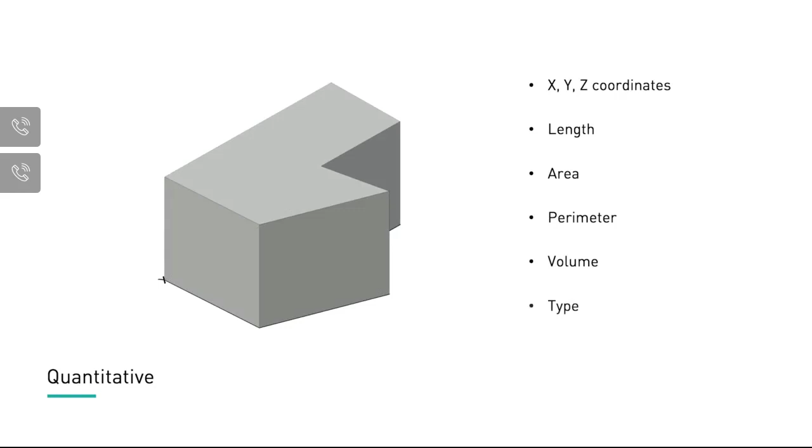XYZ coordinates are a way to locate objects in relationship to a universal system. A vector will give you the length, a polyline will give you a surface and the perimeter. Prisms will give you a volume.

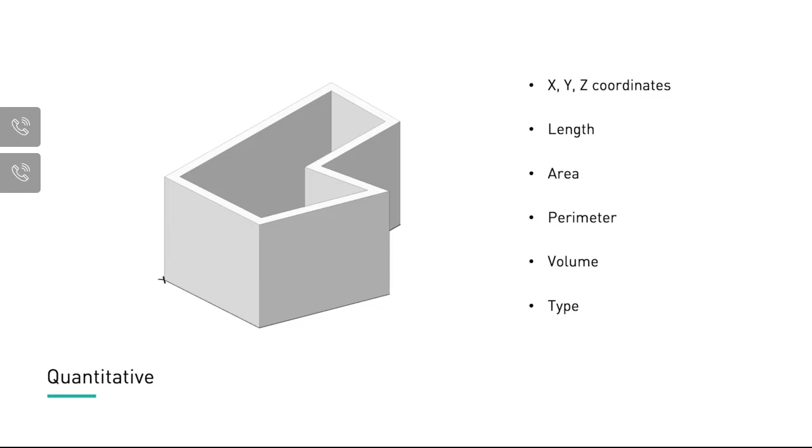And as you progress and assign real building element types, you will start qualifying what the geometry represents. Not only will the walls have a geometric quality, but they can be defined with components. Those components can be qualified with materials.

Examples of qualitative data include the location of building elements in the project. This is how objects are organized in the model, which is really important if you want to collaborate with consultants on BIM projects. I'll come to that later.

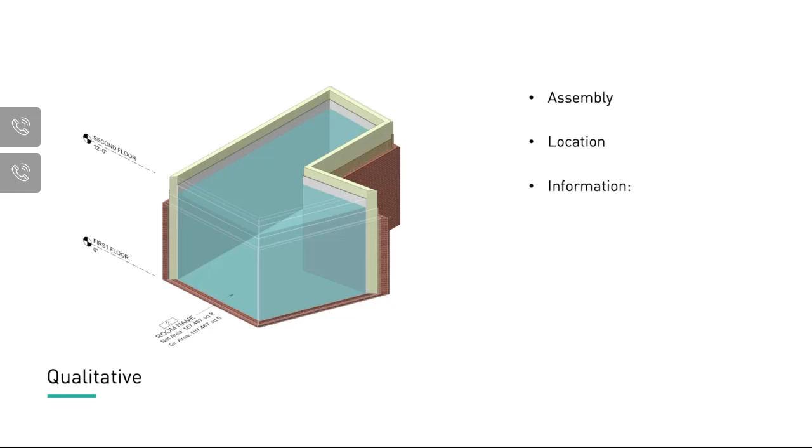So each object will have various sets of qualitative data. A wall, for example, will have materials assigned to each component. The assembly may have a fire rating, an acoustic rating, a function such as shear wall or bearing wall. These are called object parameters.

IFC property set is a type of data used and actually a very important aspect of BIM collaboration. IFC, or Industry Foundation Classes, is mostly known as a file format, but it is actually more than that. IFC property sets allow software to organize the data for building elements, making it possible to communicate between platforms.

Each software has its own internal ways of organizing a BIM model. This format allows those digital models to come together in an organized way. I'll come back to this in more detail later.

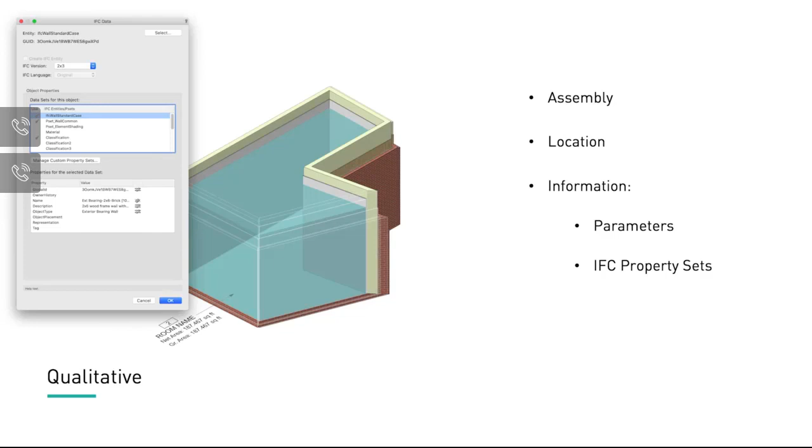As I described on the previous slides, the data can really be anything you want. You can qualify any objects the way you want. We call this a record.

If the data is not included in the object parameters, you can add that data with a custom record. Think of it as a piece of information that you attach to an object, and that information becomes part of it.

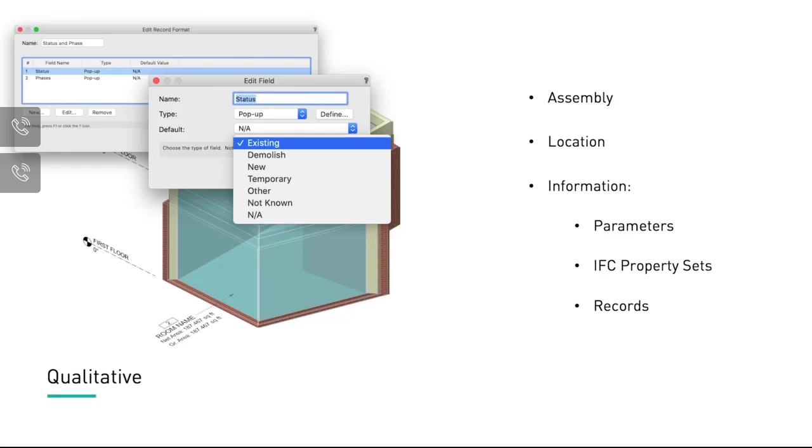As a designer, you can model anything with any types of geometries. For example, you can easily model something and make it look like a building, using solid modeling, push-pull surfaces, NURBS. Those are the types of geometry that will give you just that.

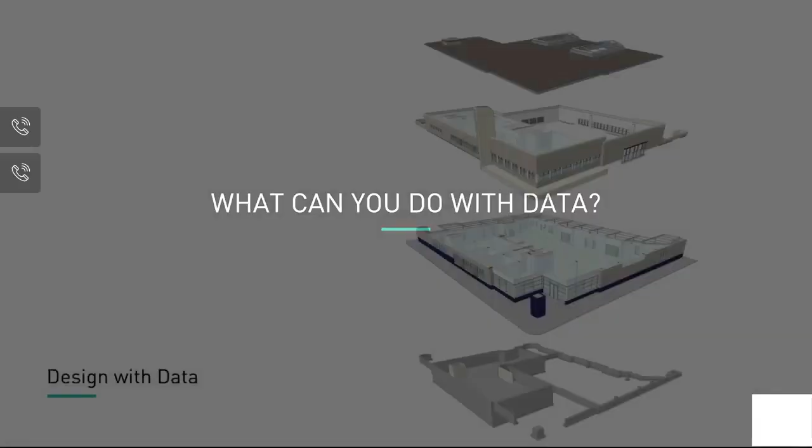Designing with data for an architect means you qualify the geometry. You will use actual building element objects to create the digital model. In this illustration, you see that walls, slabs, doors, windows are used to not only visualize the project in 3 dimensions, but also to automate drawing creation.

Generating elevations, sections, etc. is one benefit you get from modeling with 3D geometry. You say, okay, I can do that with simple 3D geometry, and I do not need to do all of the work and create an actual building model.

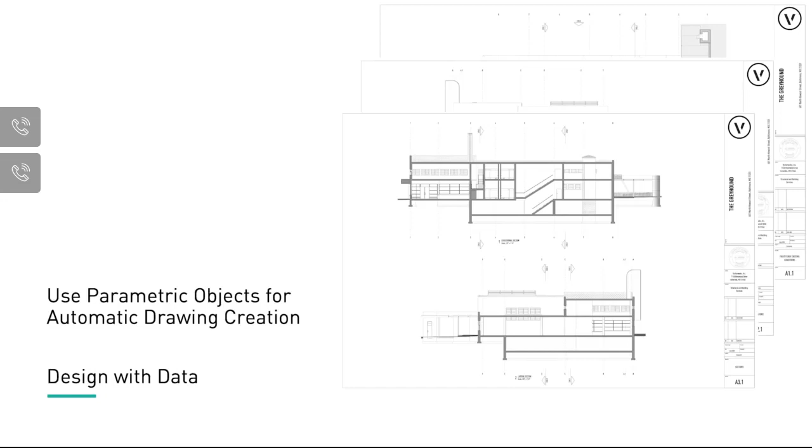Well, here are other benefits of designing with data: automatic creation of schedules and takeoffs. This is where the qualitative data really starts to pay off. When using a door object, the door will have a geometry, but will also contain information such as the frame type, materials, finish, door hardware, fire rating, etc. All of this can be automatically reported on a spreadsheet and will be updated when a change occurs. There is a great gain in efficiency when doing it this way.

Okay, so maybe you already know or are already doing all of this, and you're asking yourself, how can I leverage this data to help my process?

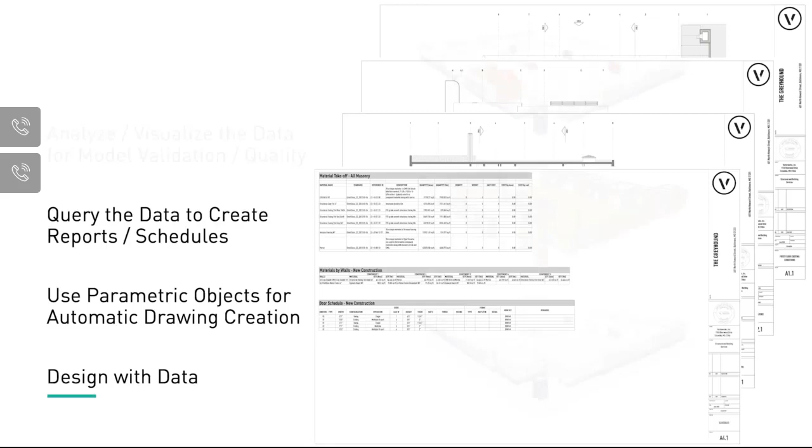There are so many possibilities to really take advantage of the data. You can analyze the model, or use the data for validating or verifying it. This process is great for ensuring that you meet the expectations of the client, or even making sure your models meet a set of standards, and even perhaps create diagrams to better communicate the design intent.

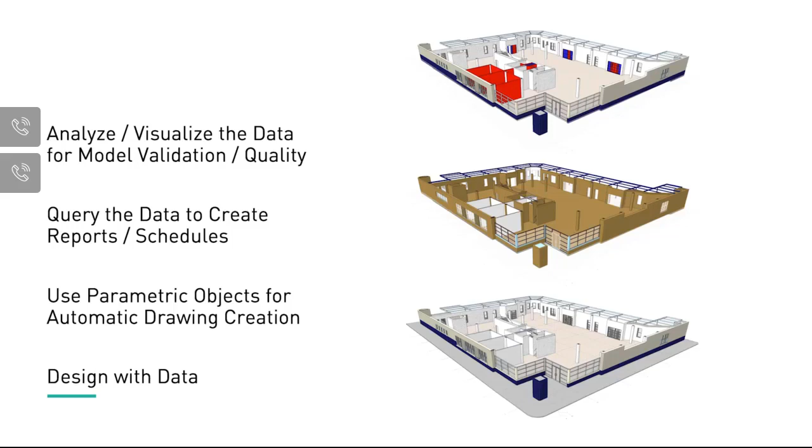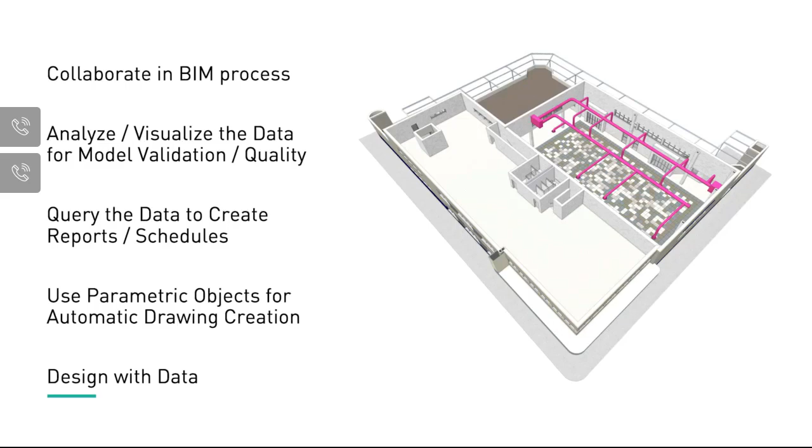We will spend some time with Sarah on how data visualization can support this. And finally, data will give you the opportunity to collaborate with the project team. This presentation focuses on these last two points: how to use the data to analyze and verify your model during the design process, and to ensure the quality of the data before the collaboration process with external stakeholders starts.

So what is data visualization? Data visualization is displaying graphically the underlying inherent information of an object. This information can be displayed as singular values, such as a 1-hour wall rating versus a 2-hour wall rating, or as a range of values, such as glazed area of less than 5 square feet, 5 to 15 square feet, or greater than 15 square feet per room.

I want to show a very simplified example of data visualization, because I think it's a fundamental aspect of BIM, even in a very simplified form. In this document, I have rectangles. These rectangles can be anything, represent anything in the drawing.

If we were drafting, we would have to use some sort of manual label or legend to describe what these rectangles represent. One of the biggest differences between drafting and BIM is that with drafting, we apply this information manually in our drawings. But with BIM, we apply the information to the object and extract that inherent information in our drawings.

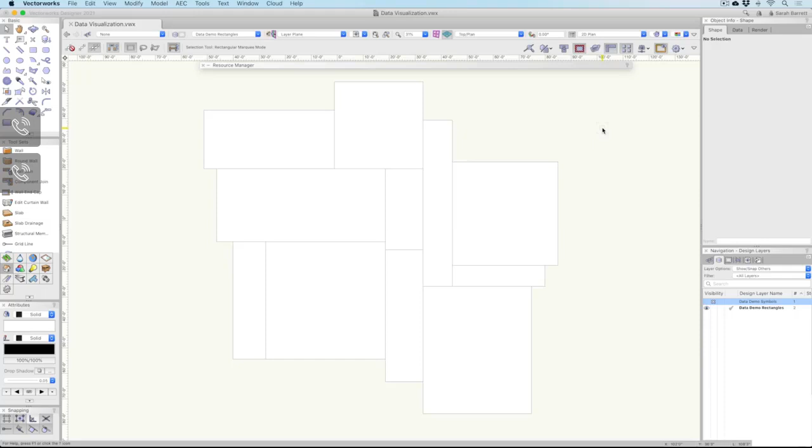This makes the process of creating drawings and representing our designs much less manual. I can convert these rectangles to BIM objects simply by attaching data to them. With data attached to them, they are no longer ambiguous rectangles, but specific objects.

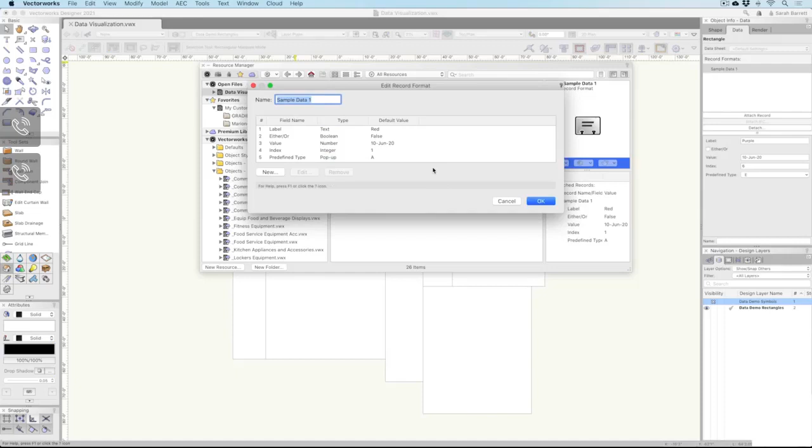I have attached a custom record to these rectangles. A custom record, as Luke mentioned, is a simple table of information that I've created and attached to the object. You can see that this record has several different types of data formats: text, checkboxes, dates, numbers, and dropdowns. All of these can be used in a custom record to better represent the data that you want to convey.

With this record attached, I can query that data in a schedule. I can tag that object to display its data in a label, and I can use data visualization to show that data graphically in the drawing.

With the object selected and viewing the Data tab, you can see the record values of this object. You can also see how the different data types are formatted in the record.

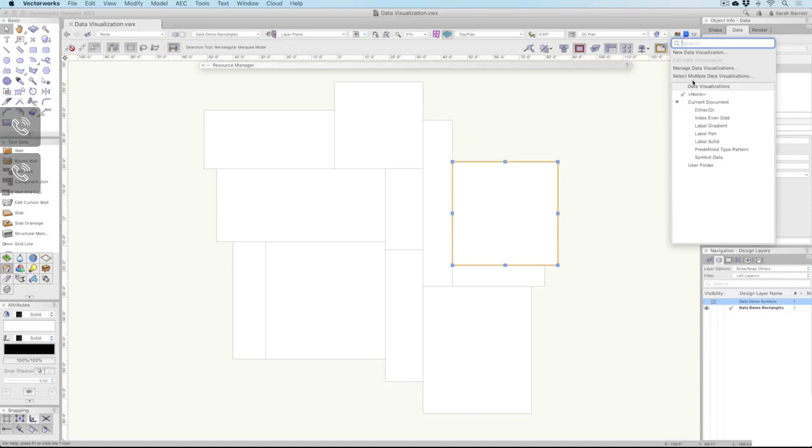So now that we know these objects have data, let's look at how we can visualize that data. This menu up here allows us to manage data visualization. I can turn on an existing data visualization by selecting one.

When I select one, you can see that all the objects in the drawing area change. Some are red, some are green, and others have been grayed. So let's look at what this is showing.

If I go to edit this, you'll see the criteria is all objects. An important thing to note is that data visualization can be applied to objects within groups, symbols, and plugin objects. I'll show examples of this a little later.

The display criteria that is selected is the either/or field of the custom record attached to our rectangles. When you're creating a data visualization like this, when you go to select the parameter that you want, the different values of the parameter that already exist in the document will show in the window below. Once you have those values, you can apply fills, line weights, and textures to each value.

At the bottom of the window, you see a checkbox that says Draw All Other Objects Gray. This means that any object visible in the document that does not match any of the applied criteria will show up as grayed. You can see that these three rectangles are gray, and this tells us that they do not have our custom record attached to them.

Now, if I select one of these grayed rectangles, remember it's selectable even though it's grayed because it's still a selectable layer and class; it's only grayed because of the visualization. I can attach our custom record to the object and it will get the fill color that is associated with the default value. Now, if I change that value in the record, the object will change color again.

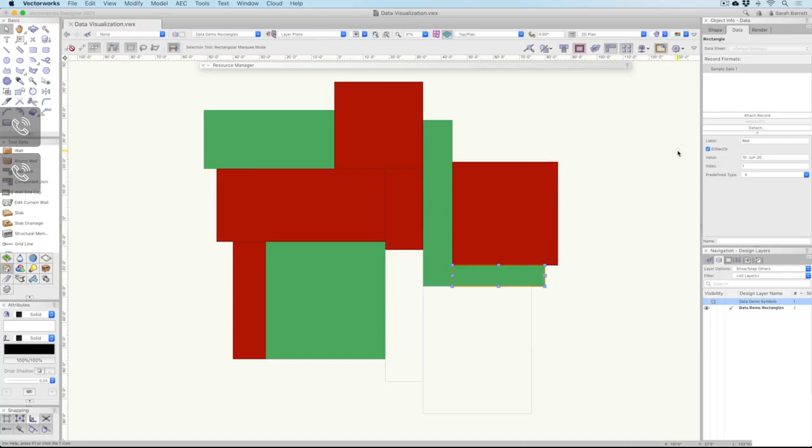The reason for this is that when you model an object, the quantitative data is already inherent in the object. It's automatic. So you can visualize this quantitative data using data visualization as well. So let's demonstrate this by creating a new data visualization. We'll click on the menu and select New Data Visualization. Next, the Define Criteria button.

Because we're going to look at quantitative data, we're going to more stringently define our criteria. We're going to filter by type and look for rectangles. You can see that these are all the object types currently in the drawing. When we select rectangles, you can see that there are 41 rectangles in the document. If we uncheck symbols, then we only have 11 rectangles.

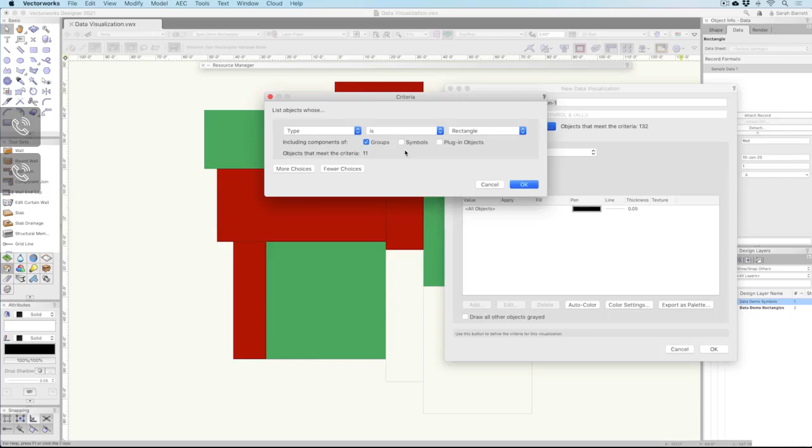We can also add more filters, such as by layer or by class. So let's make sure that we are only looking at rectangles that are on the data demo rectangles layer. We'll click More Choices, select Layer, and then Data Demo Rectangles.

We still only have 11, so filtering by layer may not have been necessary at the moment, but it's important to set up these things with the appropriate criteria from the beginning so that as the file grows and changes, these visualizations remain correct. This is a good practice, not just for creating data visualizations, but whenever you're working with data, be it with creating schedules, tags, etc., the correct criteria is key.

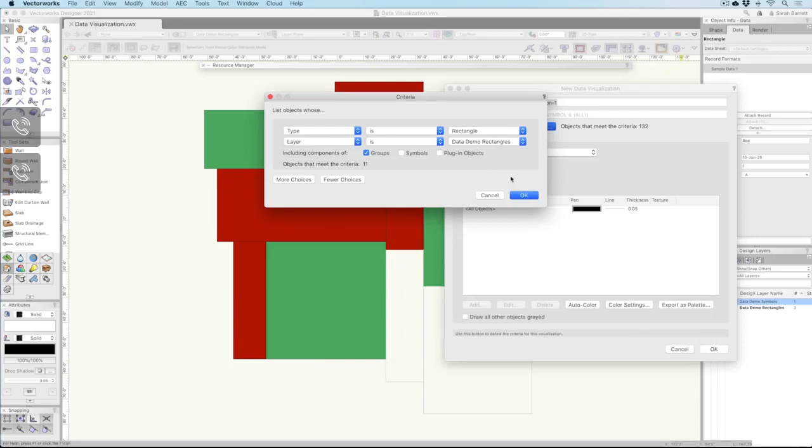So now, if we want to find the quantitative or inherent data of our rectangles, we need to choose Objects Using Function for our display criteria. If you look at the list of possible functions, they mostly refer to an object's size or location, the information that comes from simply creating the object in the file. So we'll stick with area. And you can see all of the areas for the rectangles in the document.

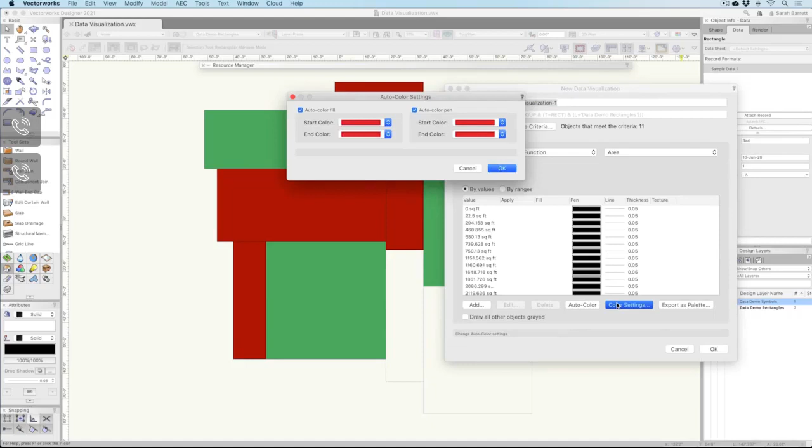If we go to color settings, you can see that we have auto color checked for both pen and fill, with the start color and end color matching. That means that the colors will range in a full rainbow. When we select auto color, you see that rainbow applied automatically. When we click OK, all the rectangles will change color based on their area.

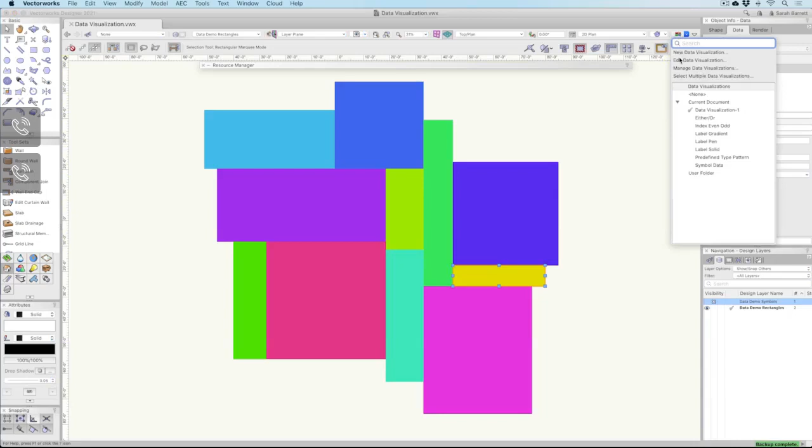There are a lot of colors here, and it's hard to remember what each one means, so it's not a very useful data visualization as is. So we're going to change it to make it a little simpler and a little clearer. We can do this by applying colors to ranges of values. So let's edit this data visualization. And instead of choosing by values, we can select by ranges.

When you choose by ranges, you don't have the existing values to guide you. This is because ranges should encompass future values or standard values that you're already aware of. Our largest value was somewhere about 2,000 square feet, so we'll use that as a guide. When we add a value, we can set the lower and upper bounds for each range. So let's make each range value 500 square feet.

I can apply the attributes and change the colors later, but first I want to set up my ranges. It's important that range values don't overlap. So the gap in the values will depend on the size of the range. So this can be a tedious process, but it's important to know that you can save your data visualizations for use later. You can either save them in your user folder, or you can save them in a template file so that they will always be available from the start of the project.

When doing ranges like this, you already have an idea of the significant range values. So these values are usually based on real standards. And as we're doing now, these values are pretty arbitrary, just to show you an example.

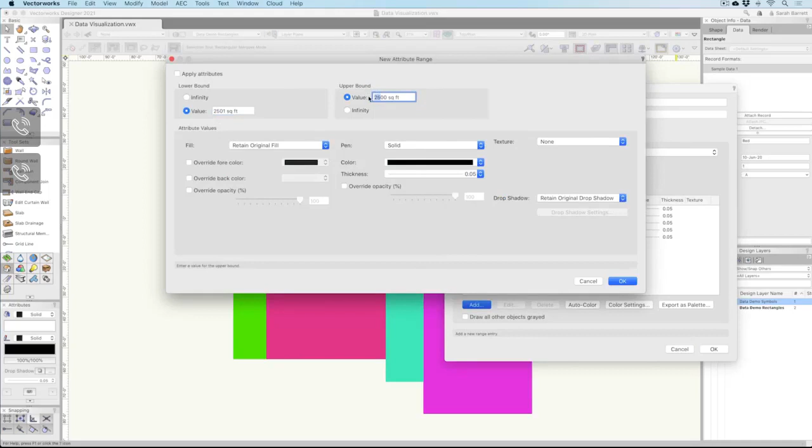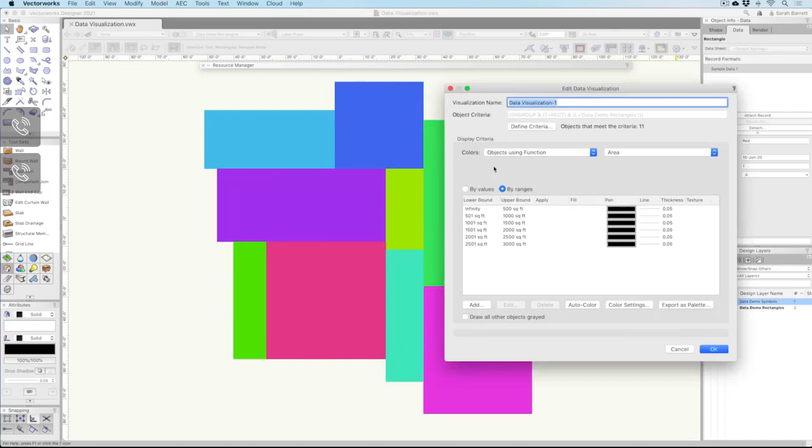Now that we have our values, we can auto color, but let's change the settings first. Let's turn off the pen auto color and then make our range a little closer in color. This way it makes the change in color have a little more meaning, where the more yellow means larger and the more red means smaller.

So now we have our ranges set up. We can see how our rectangles stack up. This type of data visualization can be very helpful while designing. For example, say I'm laying out spaces or dividing an area into smaller areas. With this data visualization active, I can draw rectangles and see immediately how their size compares.

As I change the size, you can see the rectangle change in the color range. This can be really helpful when trying to keep room sizes within certain areas as you're working on a program. It's also important to remember that although these are just rectangles at the moment, they can be converted into more intelligent BIM objects like spaces. Just because your end result will be a BIM model doesn't mean that these quick and easy tools can't be useful and help you further your design.

So now let's look at some more examples of data visualization and how you can use it with BIM objects. So this file that I'm opening up now is a renovation project. So there are existing, new, and to be demoed objects all coexisting in this file. It's important to keep them organized. So they are classed by their status, as well as having custom records attached to them in order to keep their information in line.

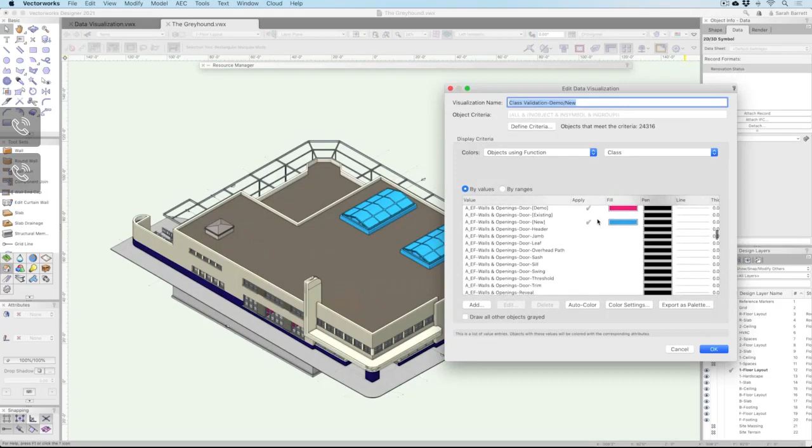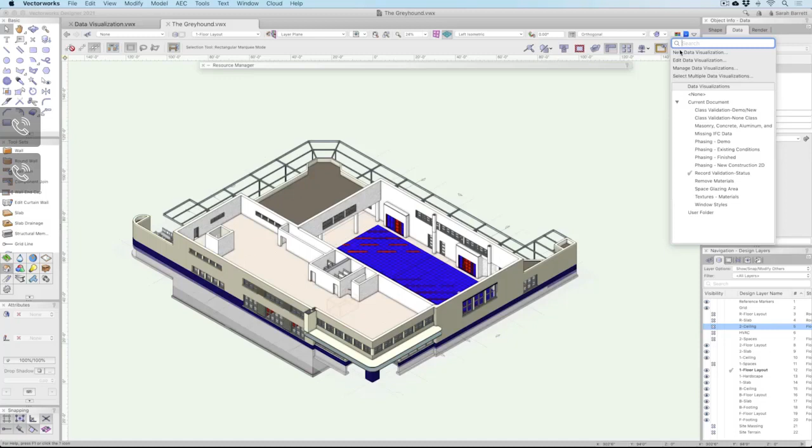There's a class validation data visualization here that isn't particular to a renovation workflow, but is really helpful in any workflow. It is a check as to whether objects are in the none class. If the none class is your active class while you design, you might end up with objects in that class, but you should have either separated them as you were going, or you're going to need to separate them at some point. So when this is turned on, it shows only the objects that are in the none class, so you can change them accordingly. Here you can see objects that are grouped, and those groups are in the none class.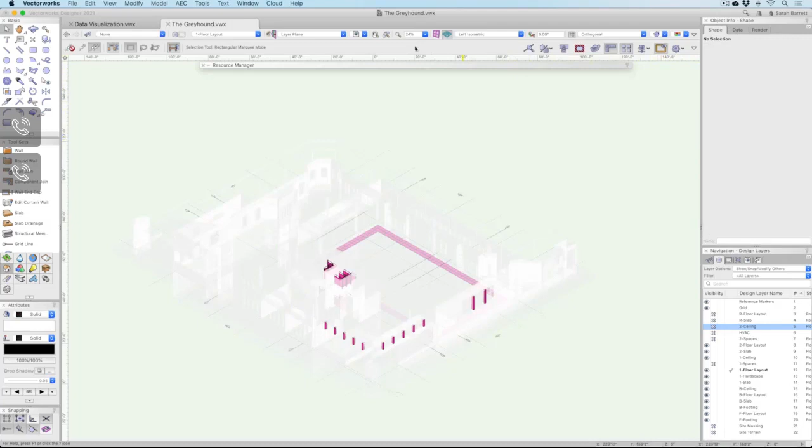Another great object to use for data visualization is the space. The space is an object that delineates a room and acts as a repository for information. Spaces are great for containing data, working with program, and producing diagrams. Here are the spaces for this file. The building is pretty open, so there aren't that many, but they are useful for calculating area.

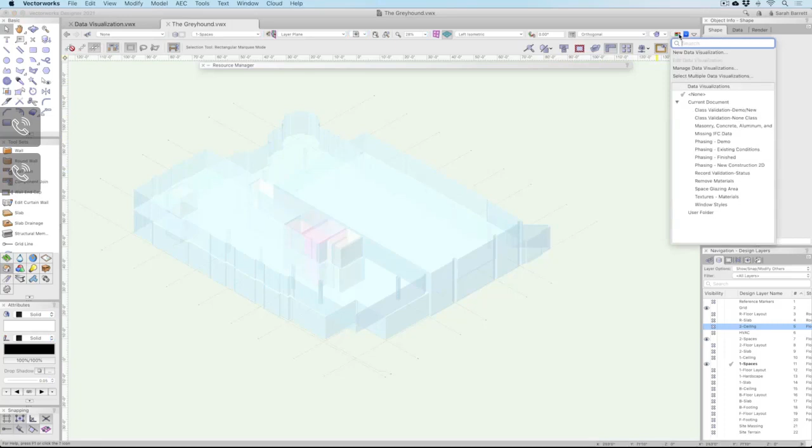Here's a data visualization that shows the glazing area ratio of each space. You can see that this information is pulled directly from the space object, and it's shown in a range. The values in the range are percentages. So the bathrooms, for example, have 0% glazed area. The second story offices have between 3 and 6%, and that large first floor open area has between 9 and 12% of a glazed area ratio.

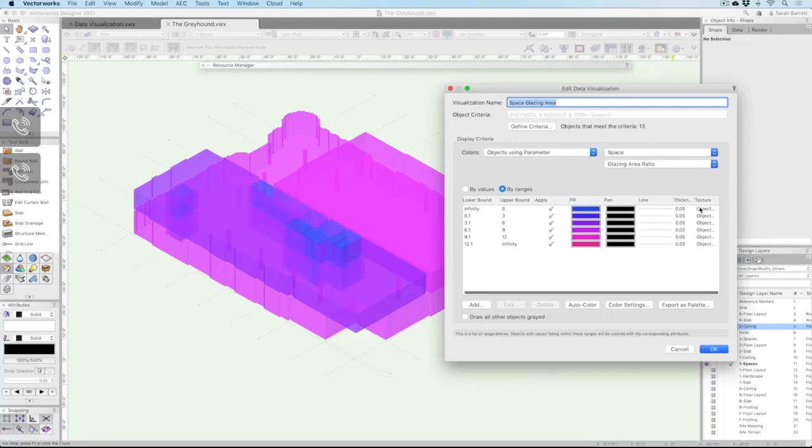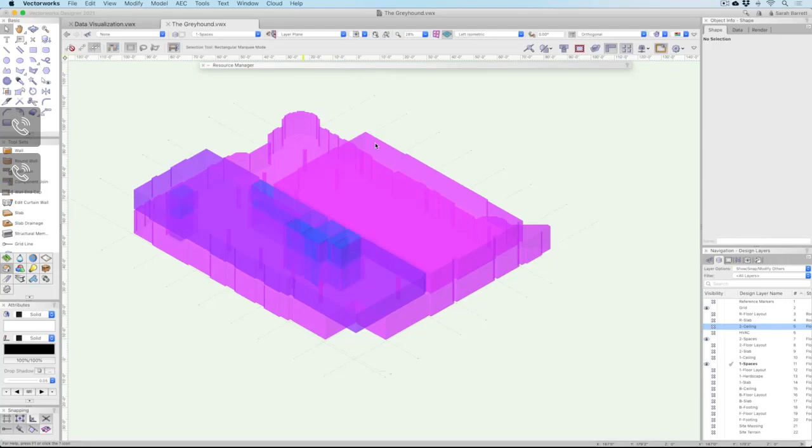There's also a semi-transparent texture that is applied to these colors, so you can see some definition below them. So you have lots of options on what data to show and how your objects can look, not only when you're designing, but also in your drawings. Here you can see a floor plan that shows the demoed and new construction using different line types and line weights.

There's a data visualization applied to the viewport, one made specifically for plan views, and it can be applied to any viewport, so you don't have to worry about coordinating your drawings manually. You let the data do the work for you. When data visualizations are used in a viewport, they can also produce a legend that can be formatted.

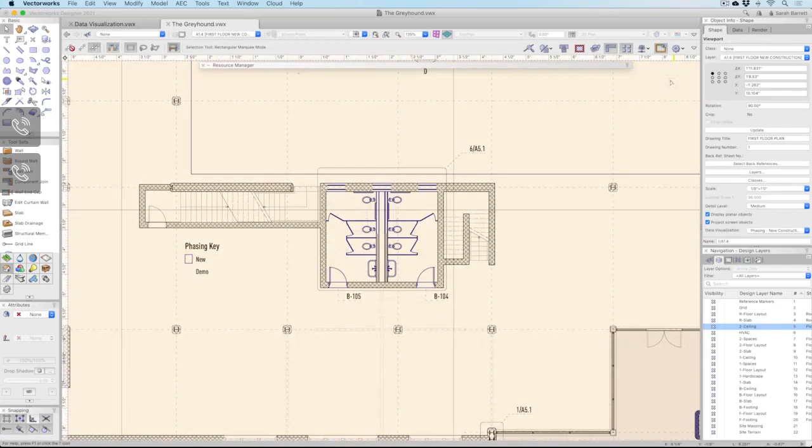Here on this sheet, you can see the same data visualization in a detail plan and another in a detailed demo plan. Because you can control the graphics, you can get the look you want and still have data-driven drawings as opposed to manually drafted drawings.

Data visualization allows you to see the data in your model, not only when you're designing, but also when you're producing your drawings. So it can be used both as a design tool and a presentation aid. When it comes to BIM though, there's even more that can be done with data.

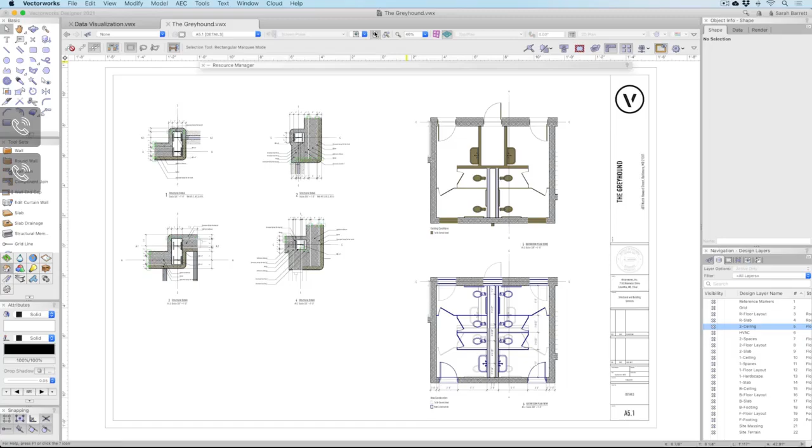You heard this many times. The I in BIM is the most important aspect when speaking of building information modeling. As we discussed earlier, information or data is both quantitative and qualitative. This means geometry and information is necessary to support all processes involved in the life cycle of a building.

Some processes may require different sets of data. We are most familiar with the efficiencies you gain internally during the design process, but many processes need to be supported during construction and for facility management. Each process requires a specific set of information.

For example, during the design process, we are most familiar with the coordination aspect, which is called clash detection process. This process requires the geometry, and it must include the most basic organizational data, which is used to locate each object within the project. This includes space objects, stories, and many more.

During the construction, the contractor may want to create a schedule or maintain a cost estimate. These are the 4D and the 5D processes. After the construction, the owner may want to manage the building operations or assets. For example, asset management requires a specific set of data called COBie, Construction Operations Building Information Exchange.

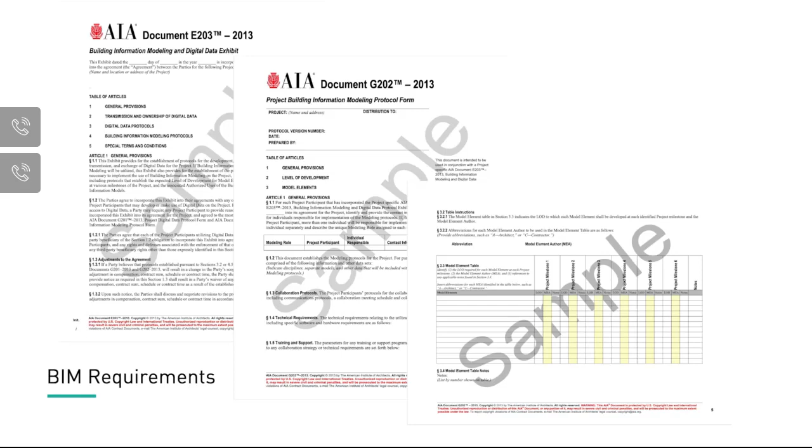We recommend that a BIM execution plan be created to set the specific goals and to establish the requirements. This is often omitted and can be a cause of dispute or litigation. Knowing the type of information needed and what process it needs to support is critical in the success of the project. One of the requirements you will establish with a contract and/or a BIM execution plan is the level of development. Let me give you a quick overview of those.

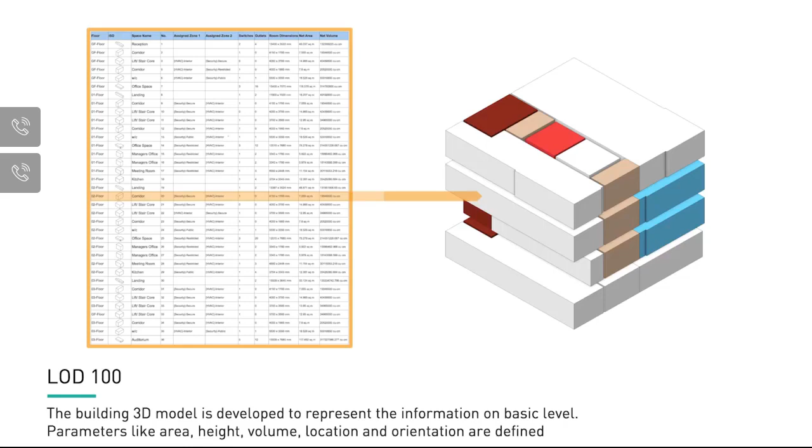A building information model level 1 or LOD 100 represents the information at a basic level. Parameters like area, height, volume, location, and orientation are defined. Note the importance of location. As I mentioned earlier, this information is critical in the organization of a BIM model. This information is typically given by a space object and the stories in the file.

Level 2 or LOD 200 adds building elements such as walls, slabs, doors, windows, but only requires generic information. So wall components, for example, are not required. Note that location and orientation are. This means that these LODs are incremental.

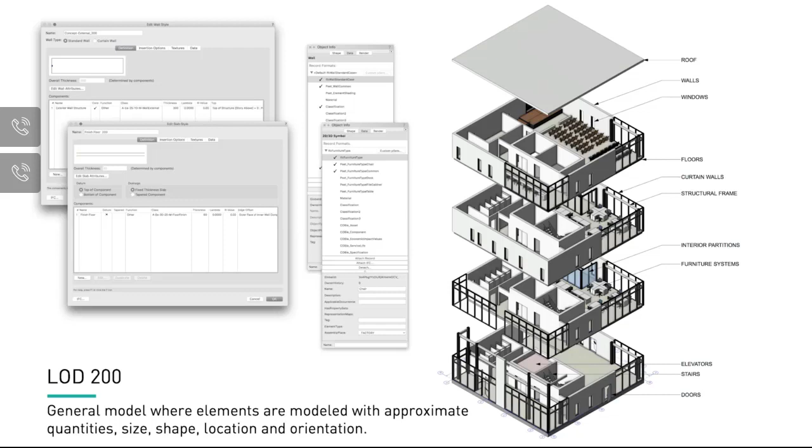And a space object will provide a relationship between the various building objects. So for example, a door will know that it is inserted in a wall and is adjacent to a specific space, and that the wall is located on the 3rd floor, etc. Again, really putting the emphasis on the organizational aspect of BIM.

When a level 3 or LOD 300 is required, the model will typically include additional information qualifying each and every building element with exact precision and will include assemblies and various types of data needed to support the project requirements. I did not include all LODs for this presentation, but LOD 400 is to support the construction processes, and LOD 500 is to support the facility management processes.

So in the case that the project owner wants to use the building information model for facility management processes, the LOD requirement will be 500. And an example of data that will be required for that level is the COBie data set that I mentioned in the previous slide.

So why am I telling you all of this? Well, in the almost infinite amount of information you can attach to any 3D object, one important thing must happen in the software in order for the collaboration process to go smoothly. I talked earlier about IFC. This is how the magic happens.

The IFC workflow organizes that data so that you can send the information required by the project. The graphic may be a bit small here on this slide, but you can see that standard objects have an IFC designation. These are called IFC property sets. They are essential for the BIM collaboration process to happen.

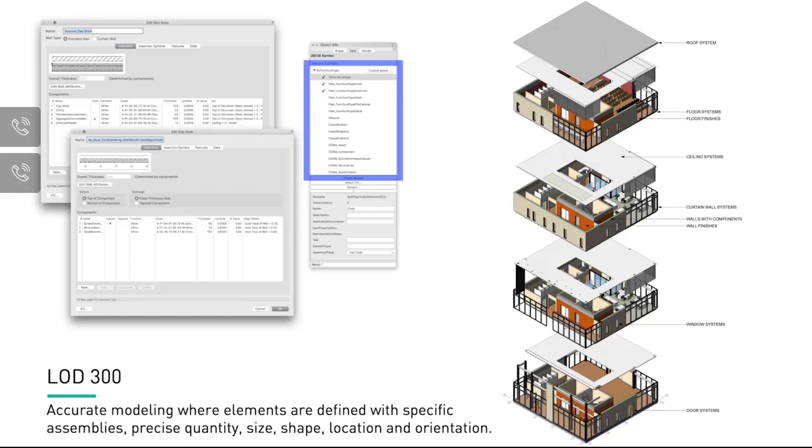The data mapping is what makes this process work. And this happens for the most part in the background, allowing you to freely design without thinking too much about it. But in some specific cases, you may want to customize a set of data or information that is required by the project requirements and isn't included in the standard. There is an inherent complexity to all of this, but I will try to break it down for you.

We learned a lot about the various types of data and how you can view it with colors as you are designing, so with the data visualization. Now let's look at how you can organize, automate, and connect various types of data. Combined with data visualization workflow, this will really make your day.

If you remember earlier, I showed you 3 types of information that are qualitative. The object parameters are integral to each object type. You can access them by editing the object itself or through its style. Any custom records can be added manually or automatically mapped to any object type.

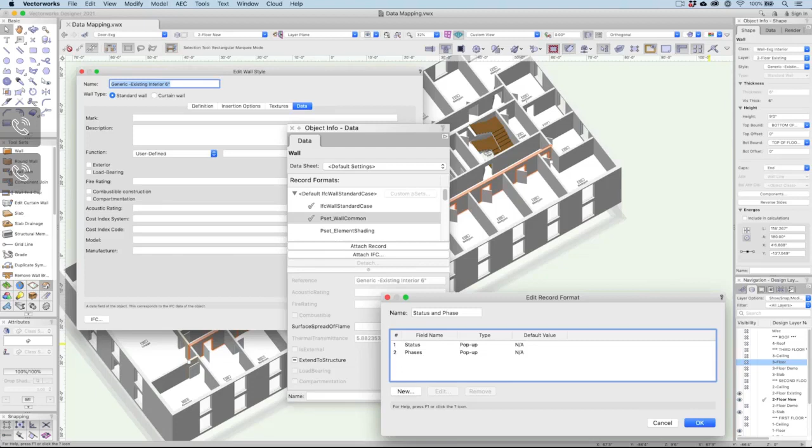These 2 types of data are used internally in the software, regardless whether you are collaborating or not on the BIM project. The IFC property sets are by default mapped onto each object type, and this mapping is used for exporting to the file format for proper coordination of information in the BIM process.

The data mapping is managed through the data manager. The data manager has 4 components. First, you can customize, save, and call default mapping at the top. This can be useful to share custom mappings between coworkers or workstations. I really want you to see and understand what the default mapping looks like.

Each object in your file is listed on the left, and each standard object has default data mapping. Typing the name of the object like wall, and in the middle you can see the mapping. By default, the mapping contains the object parameters and the IFC data set. The way I can automate or assign a data or a record is by adding a new data set to the specific object or by mapping it.

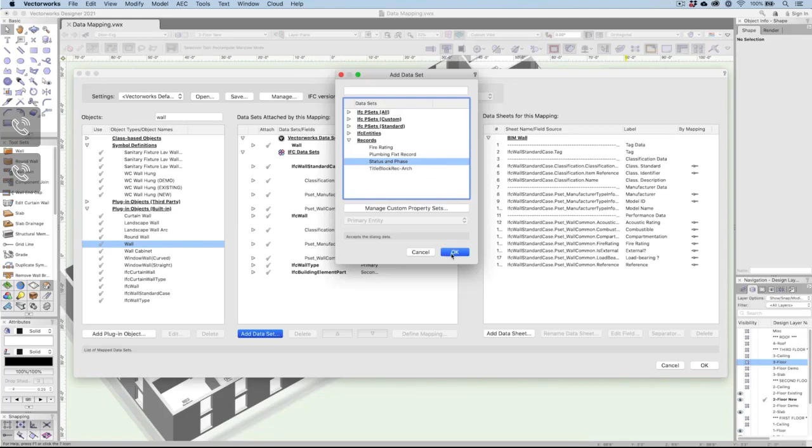Custom records and IFC property sets can be mapped this way. Let me find the status and phase record I created and map it to the wall object. Now you can see that the record appears along with the IFC and object parameters. I'll come back later to discuss what data sheets is on the right-hand side.

Let's select wall and look at the data pane. You can see by default, all data sets that are mapped. IFC data sets are used in the exported IFC file for the collaboration. I'll come back to that.

Let's apply what Sarah showed you with data visualization and look specifically at the status record that I mapped. Once mapped, the record will show accordingly in the data pane. This will allow me to directly access the specific set of data and assign the data and confirm the changes that are made as I design.

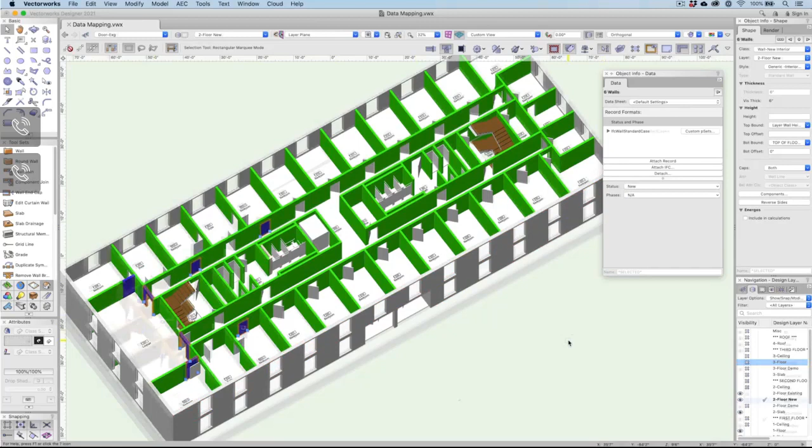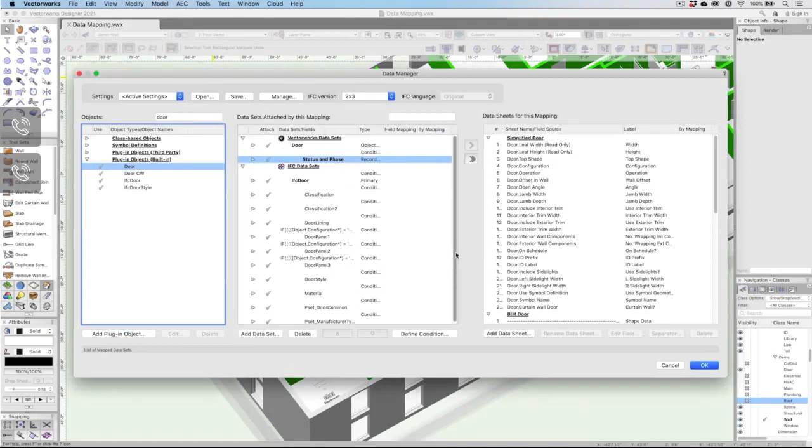Remember that this record is now mapped to only walls. If I want to use the same record on other object types, you must map the same record to them. I'm showing you doors here, but you can also map records by class and by symbol name. You can follow on the screen all object types I mapped the record to, and applied the data. Here is the final result.

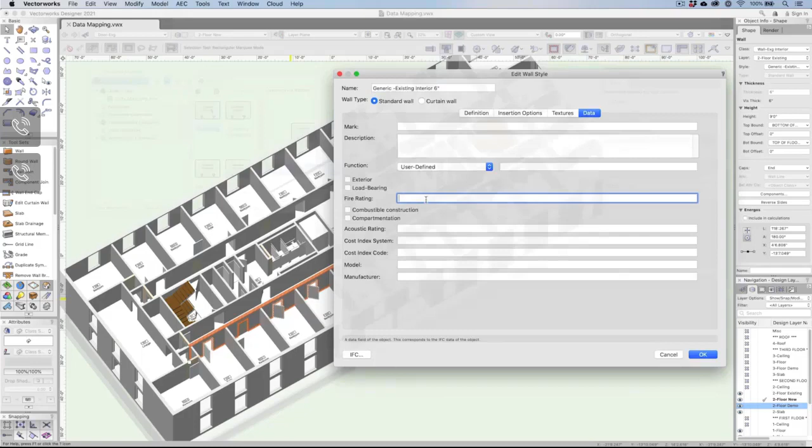I wanted to give you one more example. Say I wanted to verify that my doors and windows fire rating are correctly assigned based on the wall rating. Even though my various objects have a predetermined field for the rating, I decided to create a custom record just for that. So here you can see the record has the 3 object types and corresponding rating value that I can match.

I have mapped this record the same way as before using the data manager. So now you can see the record is showing for all 3 types of objects. Additionally, I created 3 data viz sets, which will allow me to verify if the correct data was assigned properly to the object.

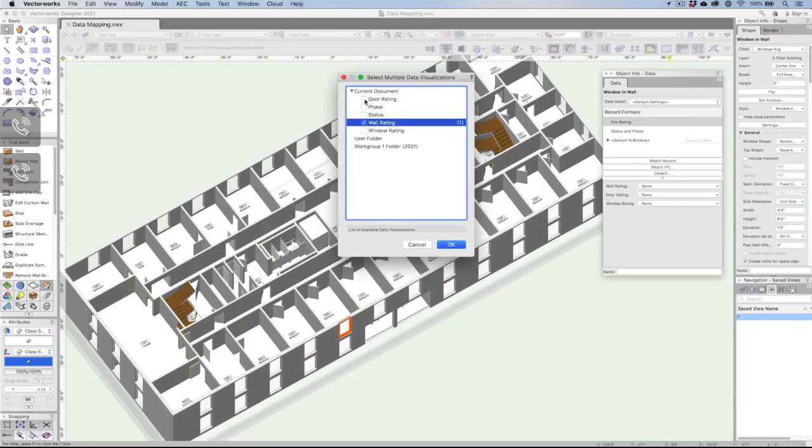With the multiple data viz option, I can color my object and do a quick quality check on that model. So here I'm selecting the 3 data visualization set. And here you can see how I can now navigate to different areas of the model and change or assign the correct data to each of the objects.

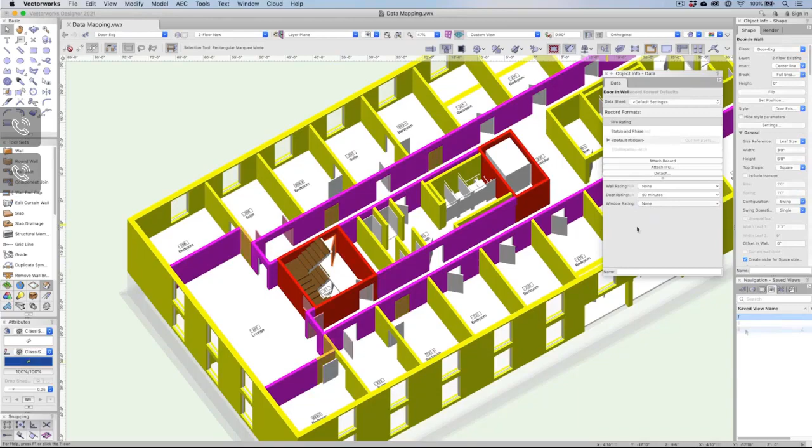And you can see that the color of the door rating and the wall rating are matching. And if they're not, then you can update that data directly in the data pane. This workflow, and what I showed you so far, is great for your internal process because you can customize it to fit your own workflow and assign the data that is important to you to achieve what you need to for your internal process.

There are 2 more things I wanted to touch base on. One is data sheets, and the last one is IFC mapping for the collaboration workflow. First, let's talk about data sheets. I mentioned this previously when discussing the data manager. Data sheets are kind of a data template that you create to organize and make all of the information you need available in the data pane of the object info palette.

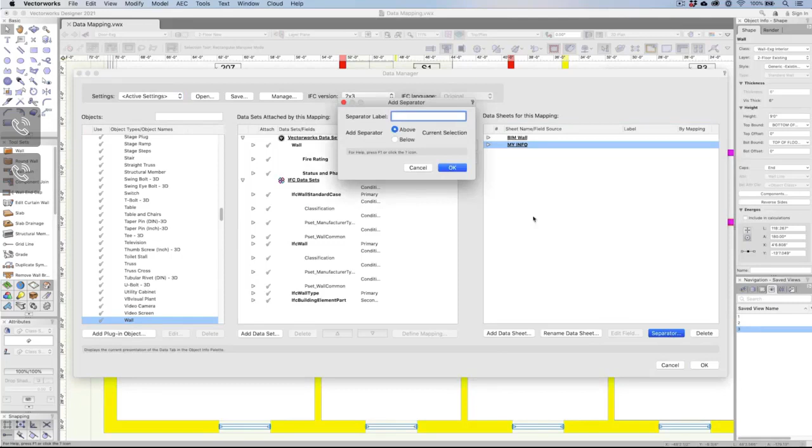But it also allows you to group any data fields from any source of data. So it means that you can combine any of the object parameters, custom records, and IFC property sets in one data sheet. There are standard sheets for the wall objects. For example, we provided this default BIM wall sheet, but you can create your own data sheet with the data manager. The example shown here is a data sheet that organizes the data required for each BIM LOD.

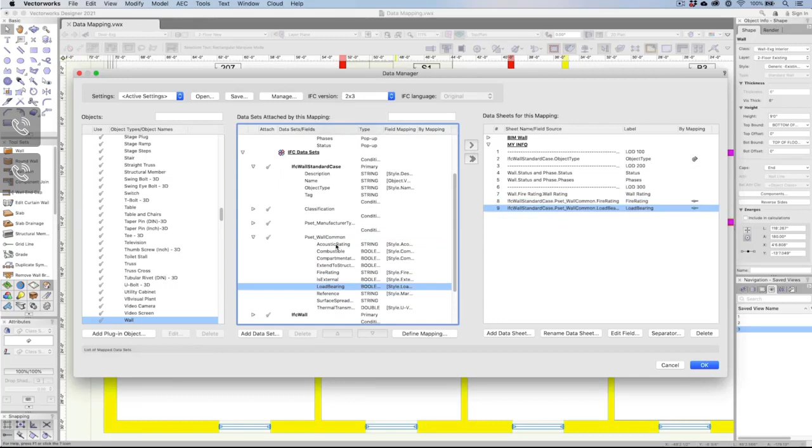You can use separators, rename the fields if you need to, and organize all data you need to access on this sheet. You can see the data fields added to the sheet are both from the custom record and IFC data. The separators give you, or the person creating the model, a cue for what information must be present at each phase. This can be useful to ensure the BIM object or the BIM project requirements are met before you export the model to your consultants.

You can be creative with these sheets. You could use them in a more traditional way for verifying data by phases of design instead. This is another way to make your workflow easier when working with so many components and in a more complex process, such as building information modeling.

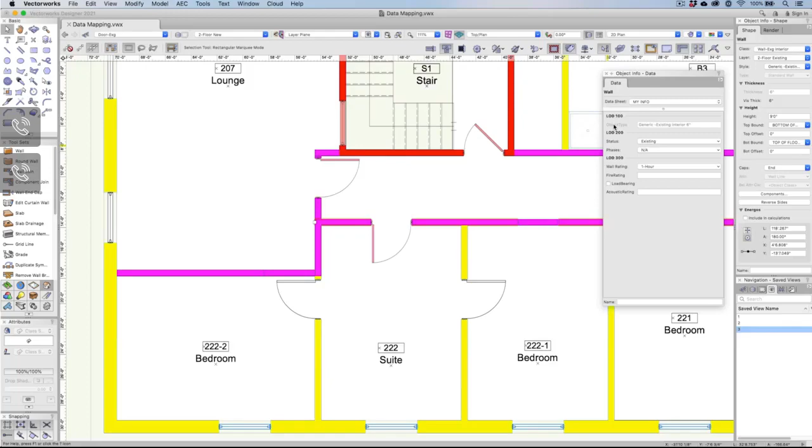As promised earlier, let's see how data mapping works and why it's important when collaborating using an IFC workflow in IFC file format. As previously discussed, IFC stands for Industry Foundation Classes and is mostly known as a file format, but it is actually more than a file format. Exporting an IFC project means that the data of that project is organized properly so it can work with files created in other BIM authoring tools.

To make this process successful, each object modeled must have a related IFC property set. And in order for the export to work, there is a data mapping assigned to each object. I call it IFC mapping because this is a specific mapping for IFC as opposed to a direct mapping of records like we saw earlier.

Before showing you how to map this data, I wanted to show you the model exported as an IFC project and look at how the data is exported and organized. With the help of Solibri, I can show you this. When the model is exported, it is exported as a tree. From the site to the building and the discipline, and also by the stories. Each one of these entities has a specific set of data that comes with it.

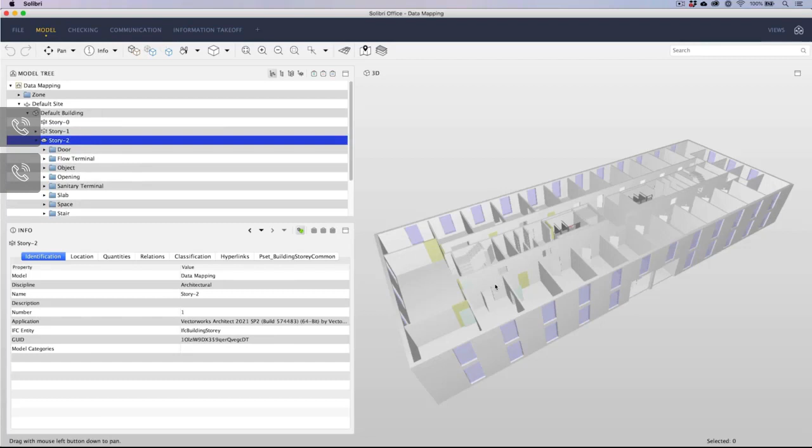Then each object type has its own specific set of data. From its identification, which could be, for example, the wall style or tag, the locations such as the floor, its height and the XYZ coordinates, its relationship to other objects, and finally, additional property sets.

Note that the property sets you currently see do not show all of the mapping we did within Vectorworks. For example, I don't see the fire rating or the status and phase information assigned to the wall. As you can guess, I did this on purpose, so I can now show you how you can ensure that the custom data you created is successfully transferred during the IFC export process.

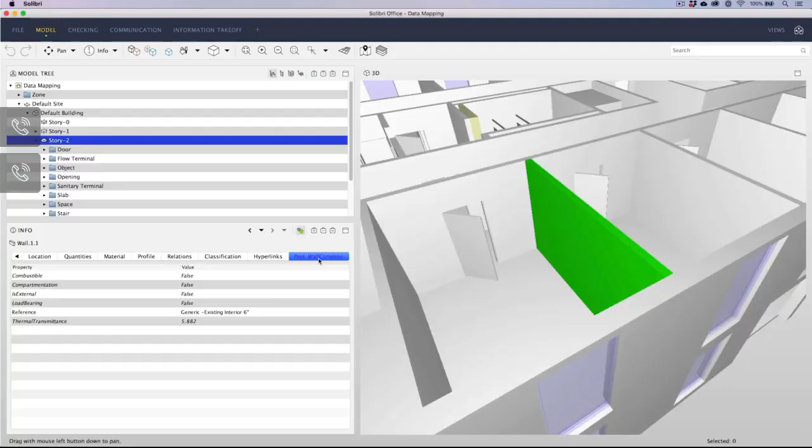Back to the BIM authoring software, Vectorworks. Let's take a look at the mapping. First, you can see that the data for the fire rating and status are in fact assigned to the wall.

But if you look at the actual IFC property set, this shows you what information is actually mapped for the IFC export process. Look closer to the wall common P set, you can see that the data from the record is not mapped to the IFC data.

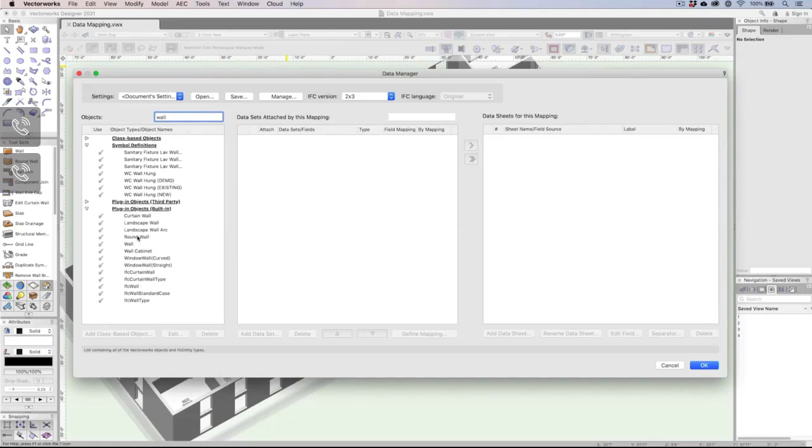So let's add these sets to the IFC mapping with the data manager. First, we'll add the mapping for the status and phase record. Because there is no equivalent IFC data for this, I will add the entire record as a custom IFC P set. After it's added to the object, then you can assign where the information is taken from.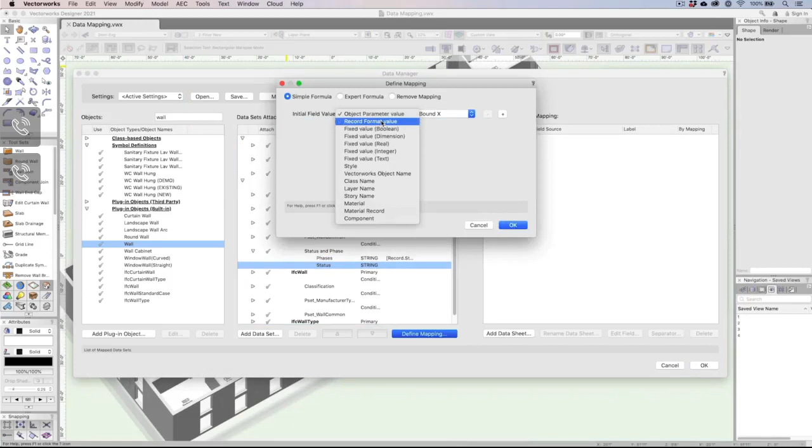So in this case, I want my IFC file to get the information I assigned from the record. This is simply how the information is pushed from the custom record to the IFC record. Then, of course, we need to repeat the same process for all object types that need to receive this type of information. And lastly, you can see or verify that the mapping was successful directly in the data pane.

The last mapping I want to show you is for the fire rating data. This one is a little bit different because a field from the wall object is already designated to receive the information. But in our case, we decided to use a custom record instead of the standard field the object offers.

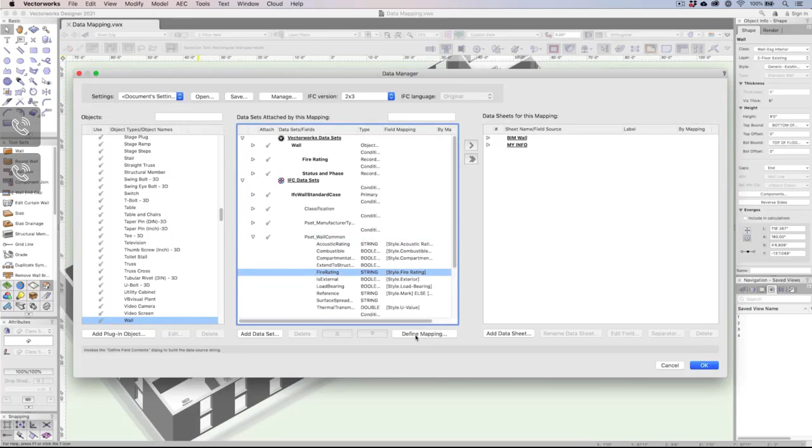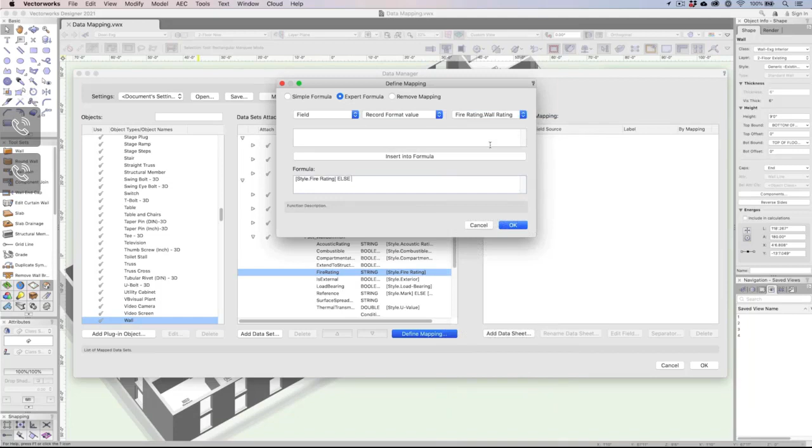As you can see, the wall common P set has an existing mapping, but it points to the standard object style data. For our custom record to map to this field in the IFC P set, you must add it to the current mapping. So using an expert formula, you will tell IFC to look first at the standard object field, and if empty, then to use the value from the custom record.

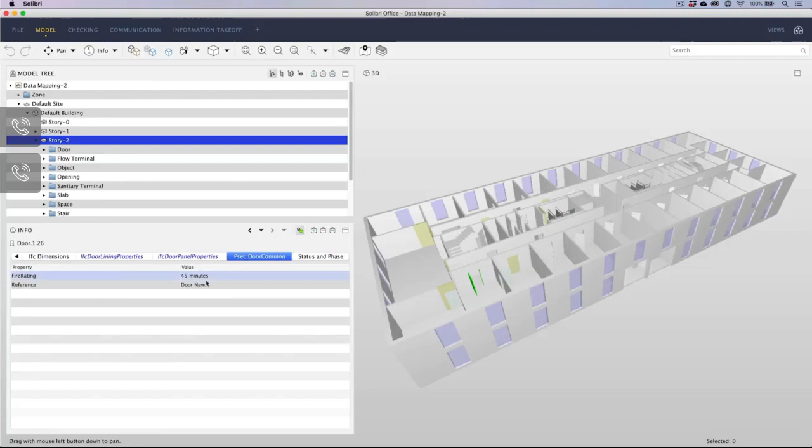Now that I have added these values to my IFC mapping, I can verify if my actual IFC project is exported correctly. You can see that the fire rating is now reading the correct data, and that the status and phase record was exported and is shown as a separate tab on the information pane. You can see that the IFC mapping was added to all of the relevant objects I mapped using the data manager.

I realized that this workflow might be a bit complex, but one of the goals I had for today was to show you how you can really make use of the data one model includes, in that you can really push the process as far as you want.

I'm hoping that after this webinar, you understand better how data can be utilized in a lot of different ways, and that any object can be qualified with any types of information used for your process. Data is not only for BIM, and you can use it the way you want. Lastly, data visualization is really powerful, and combined with data mapping, it can really help your firm be more efficient and provide quality models and documentation to your clients.

Well, that was great. Thank you very much, Sarah. Sure. And thanks to Luke. Yes, indeed. The topic is so interesting, and as you demonstrated, so easy to get into, and then you can get so much from it. So we do have a number of questions that came in during the session, and I saved a number of them so that we could address them afterwards, because I think everybody would appreciate hearing the answers too. So I'll get right into those.

So here's one of the questions. How much time should we set aside for a process like this? And how often should this process be undertaken in a design process, from schematics through to contract documents?